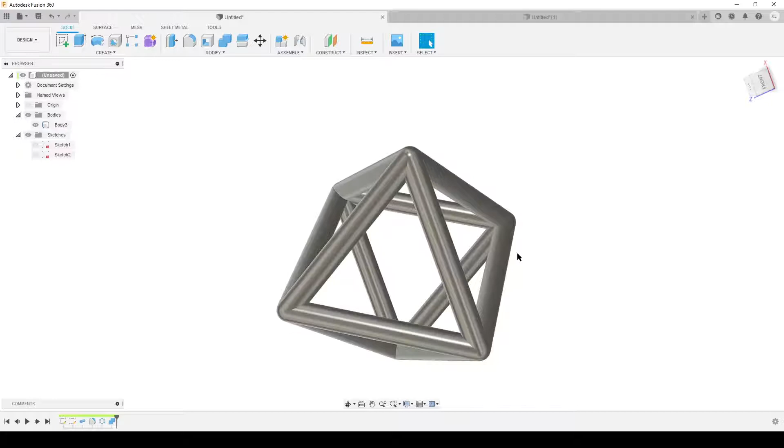The basic idea is that this is made of squares. We have one lying down here, one standing up here, and one perpendicular to that. So three squares arranged in a circular pattern around this triangular face - one lying down, one running over there, and one over there.

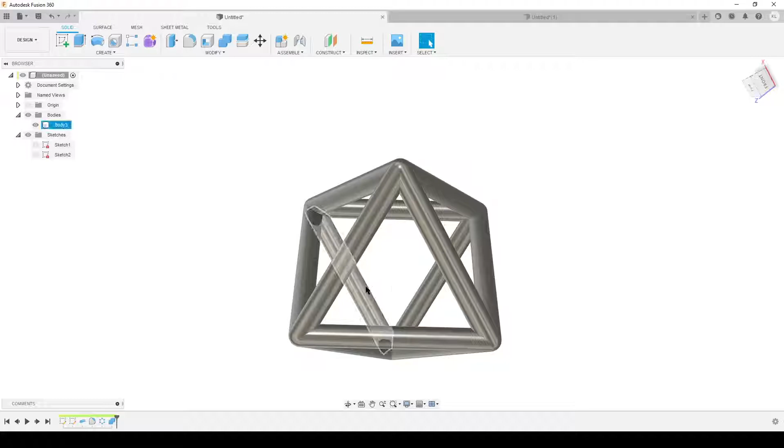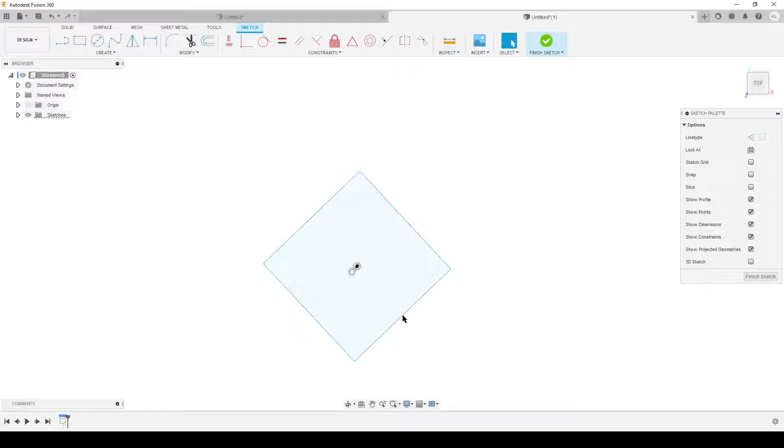Let's do that and see if it works. We start a sketch in the direction we want, and use the polygon tool because it's easy and gives us all constraints. Tab over and type 4 for the number of sides - let me redo that, hit the wrong key - to get the correct 4 sides. We'll make it horizontal and vertical, doesn't matter much as long as it's locked down.

I'm going to dimension this to be 50. This is going to be used to run the pipe, so the dimension 50 here is the center line of the pipe.

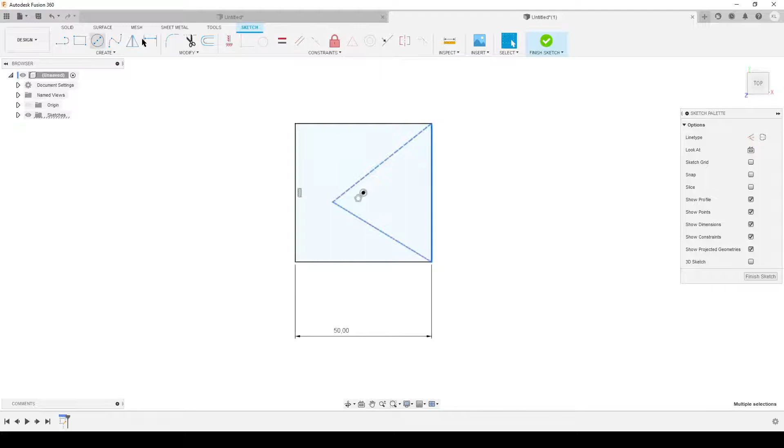Now I need some lines - a construction line from here out to here, down to here. Hit escape to stop the line command. Select these three lines and make them equal, so you get an equilateral triangle. One more line from the vertex of this triangle to the midpoint here, and we're done with the first sketch.

Now we make a second sketch, on the plane that runs along this center line of the equilateral triangle. We'll hit P for project, project in this line, hit OK, and hide the first sketch.

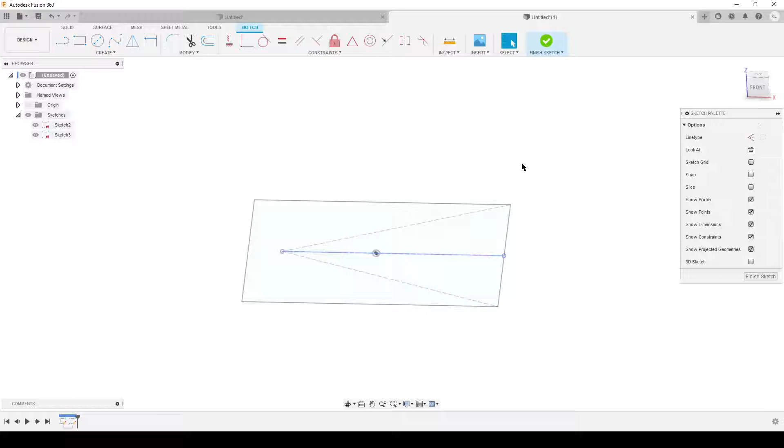Turn this into construction geometry by hitting X. Do a circle construction from here to here - if you get confused, you can turn on the first sketch to see where the circle is. We'll do some lines from this origin point, straight out, making sure to get that perpendicular constraint up to here, from here to here. This is the face of a triangle.

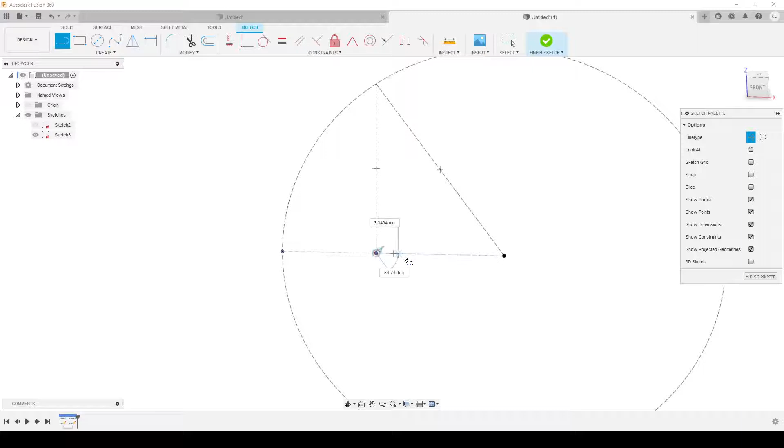Now we make the axis we need, starting here, going to this line and finding the perpendicular constraint. We get perpendicular here and hit finish sketch. Turn on our two sketches, and now we have two fully defined sketches - nothing flying around on the screen.

Hit S on the keyboard to find the pipe command - the normal solid pipe, the blue one. We select this frame here, and do a small thing in section size: remove this and type in 'diameter,' or whatever you want to name it. We name this parameter so we can use it in the fillet command, which I'll show you later. Let's set it to 8 millimeters for now.

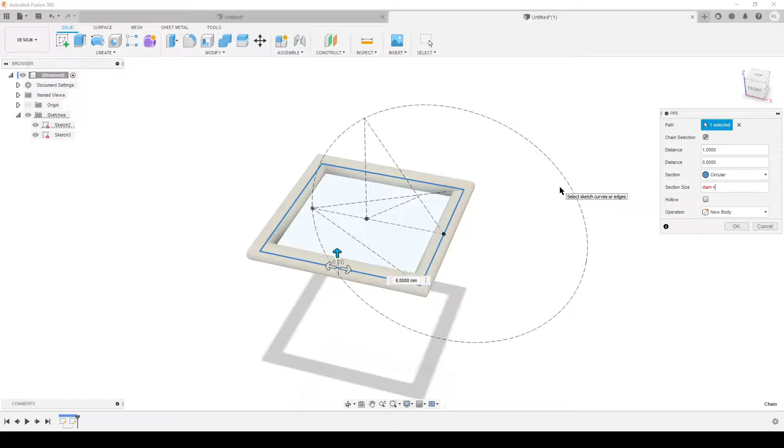So diameter equals 8, enter. We turn on the edges so we can see all of them. Now we need to soften out the edges.

So we're going to do a fillet - I already have it there. We select only the outside arc of these vertices, and do the dimension here using our diameter parameter. But that's of course too big because we need a radius, so we can divide it by 2.

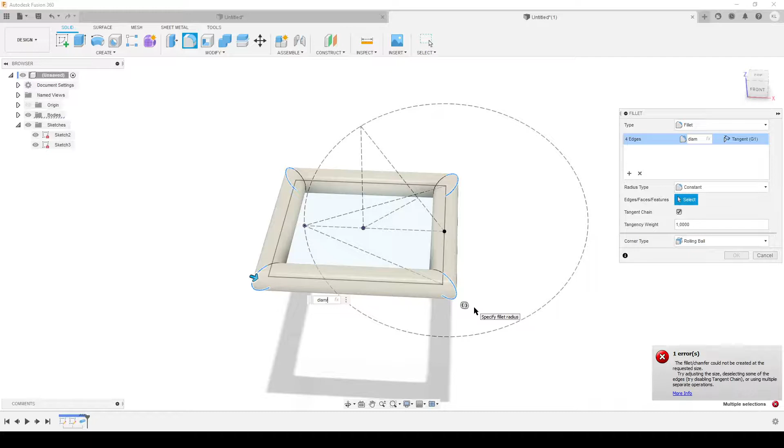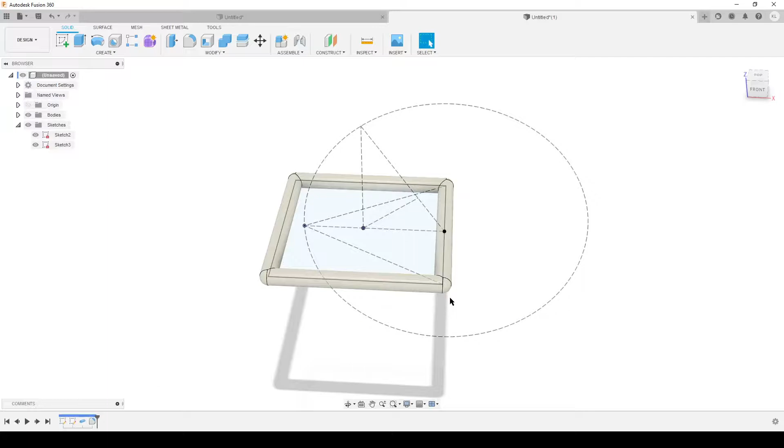The reason I did it like that is if I go back to the pipe command, it doesn't say diameter anymore, but the diameter parameter is hiding here. So I can change this now to 10 and it'll update the fillet command, or I can go down to 5. I don't need to go back and also edit the size of the fillet - the fillet is always half of the diameter, the radius of this pipe.

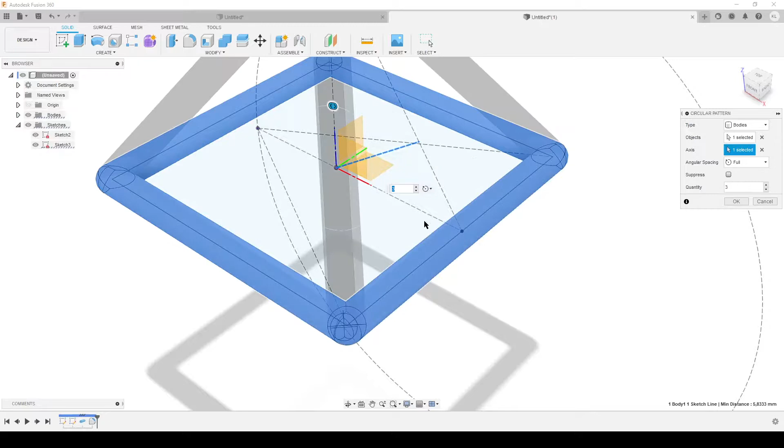So with that we've done almost everything. Hit S on the keyboard for circular pattern, select bodies, this body, and our beautiful axis we made earlier. I'm going to turn off - oh no, it's always here. I'll make it 3, that's correct. Zoom out, highlight everything, do a combine, hit OK, and now we have only one body.